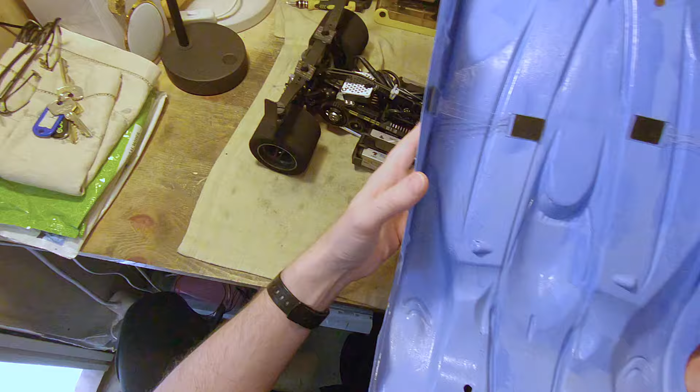So the body is quite simple, and I just added some stickers - 990 Viper, Hobbywing because it's Hobbywing electronics, Power HD because the servo is Power HD. Yeah, that's it for the body.

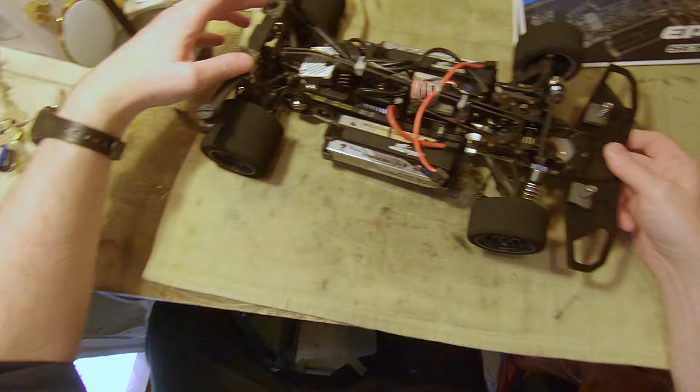Also I added some foam here under the body mounts, or on the body mounts, so the body will sit good and not vibrate. Also, if the body is very loose, you will hear a lot of noise from the body when you are driving, and I don't like that at all. So the body should now sit quite tight to the car.

I added the fan to the motor here, and I used the fan mount that I showed you in my previous video. But one thing is that the holes in the fan mount here are for 2 or 2.5 millimeter screws, but the holes in the motor mount are 3 millimeter. So you have to drill up these holes here to get 3 millimeter screws down.

Also, this is new for me, because the 989 did not have this - this chassis stiffener, or whatever they call it, I'm not sure. That's here on the car. It would hit on the fan here, so you should maybe try to get a fan which is not this tall.

Also, I added this grid on top of the fan because where I'm driving there are maybe some small rocks sometimes, so just to lessen the chance for something to get into the fan, I added this grid here. So I had to use my Dremel, my filing machine, and remove a bit of this carbon fiber just where it would hit the fan.

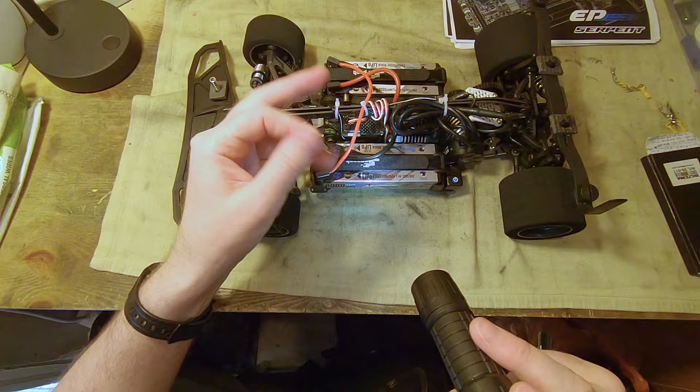Is there something more? Well, I have the connection servo, of course. I don't have a transponder now - is that the right word? No, I mean the device you use to track the laps, time the laps. I only have now the receiver, the fan, motor fan, and of course the servo. So that's the 3 plugs you see here now.

Yes, and batteries 2S. They are connected in series, so you have 4S power, and that is quite simple. You see, from the ESC you have the plus here to the plus of this battery, and the minus to the minus of this battery, and then you just use this cable to connect the plus of this battery to the minus of the other battery, and that will give you 4S power when they are connected in series.

And if I turn on the car now, you can hear the fan from the ESC and the motor fan there, and the ESC is counting up to 4S. So that's really just the car.

The setup I will also show you in the description, but it's like the default setup, except I only use 1 degree camber in the rear and 1 degree camber in the front, 1 degree outward toe in the front, and I think 2 degree inward toe in the rear. So I use less camber in the rear, and that's because I don't drive on real tracks where I can drive really fast and have high corner speed, so I don't need more camber in the rear.

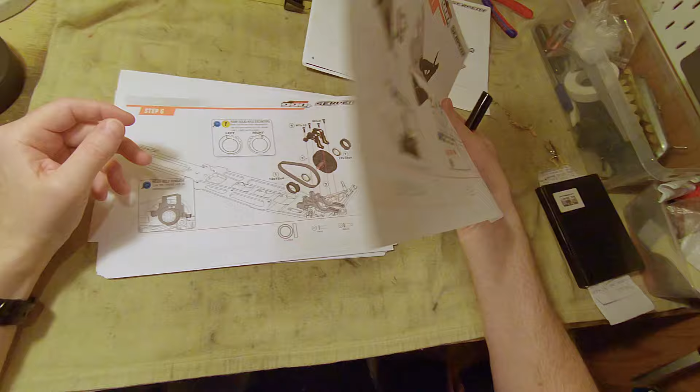Was that something else there? No, that was all right. Here is all right, I will just comment on things that I have something to say about. If I don't say anything, it's all right.

This is the rear sway bar, and you have 4 screws for the mount in the front, and 2 set screws in the rear. But when setting up the car, you want to disconnect the sway bar completely when setting the droop. To do that, if you just remove the 2 set screws, it's not easy to get this wire or metal piece out of the mounts. So you also have to unscrew the 4 screws, then you can lift it up and get it out. If anyone knows an easier way, comment.

Then we have the rear upper arms, with these small plastic bolts you use here. Sometimes this can be a bit hard to get in, because it's easy to get the wrong thread and destroy the threads either on the plastic bits or in this part. Maybe this part could be aluminium, though I'm not sure if that's a good idea. At least it would be nice if Serpent included a few spare parts, maybe 4 instead of 2, in case you do something wrong and destroy the pieces.

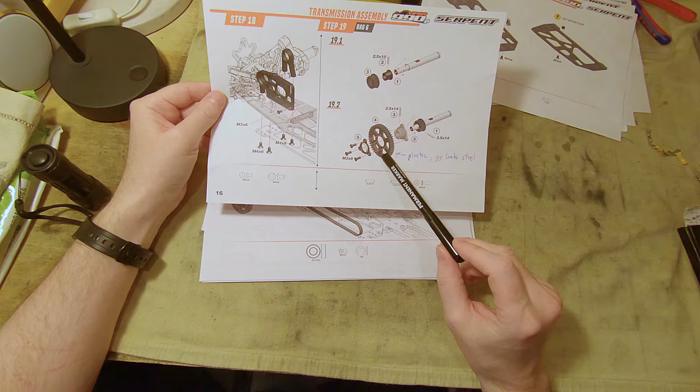Then we have the stock spur, which is plastic or composite. As I said, I bought the steel spur, not the exact same tooth count. Move on, nothing to say here, everything is good.

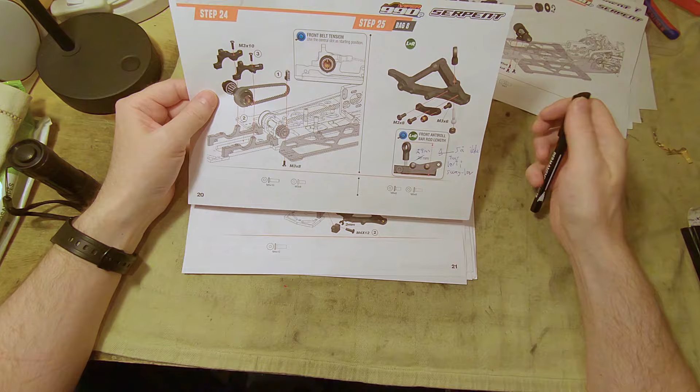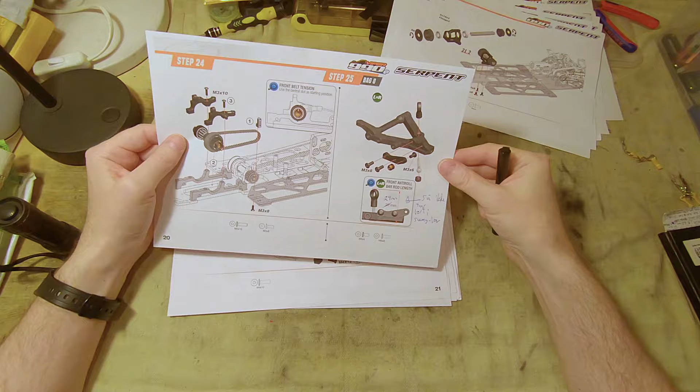Then we have the front anti-roll bar rod length. Some people online say that if you keep this at stock 28mm, the front sway bar will touch the front axle. So you can lift it up a bit. I got it to 29mm or even a bit over, so you don't have any touching parts.

Not much to say about the servo saver, but I used a bit of thread lock on the thread so it doesn't unscrew itself. I'm not sure if that's even a problem, but before tightening I put on some thread lock. I think I did a bit more than 1mm just to be sure — you don't want a weak servo saver.

These are the links from the servo saver out to both sides of the steering. This rod could be a bit shorter, because if you go with the 41.5mm from the manual, it goes quite far inside the rod ends, and you can even see it swelling out if you put it too far in, and it could break out. So this rod could be maybe 4mm shorter — it doesn't need to be as long as it is. At least that was the case for me; maybe for others it's fine as is.

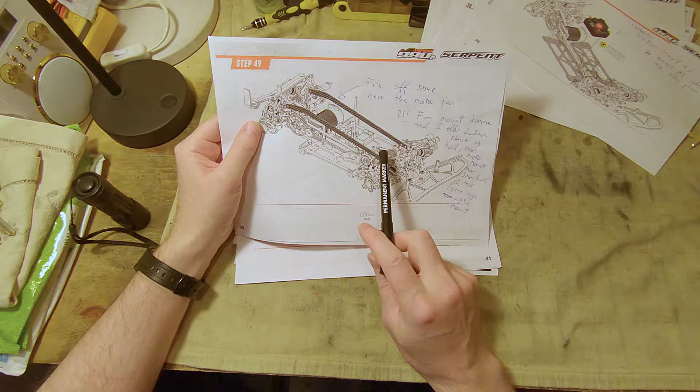This carbon fiber chassis stiffener, or body stiffener as they call it, I had to file off a bit where the motor fan was. Also, as I said, you have to drill up the fan mount holes to 3mm if you're using 3mm screws. The motor mount has 3mm holes, but the fan mount just 2 or 2.5.

So that's, I guess, everything. Nothing big to complain about. The user manual was okay to follow, and all the parts were included as they should be. Nothing broke when I finished off the car.

Let's see. Yeah, I can see it's quite a tight fit here with the ESC. The sensor cable is quite tight here, so I don't think you could use a much bigger pinion. As I said, it's a 32 tooth metal spur gear and a 22 tooth pinion. You could maybe use a 23 or 24, but not much more room. Then you'd have to move the electronics some at least. You can always make it possible, but with this setup it's alright.

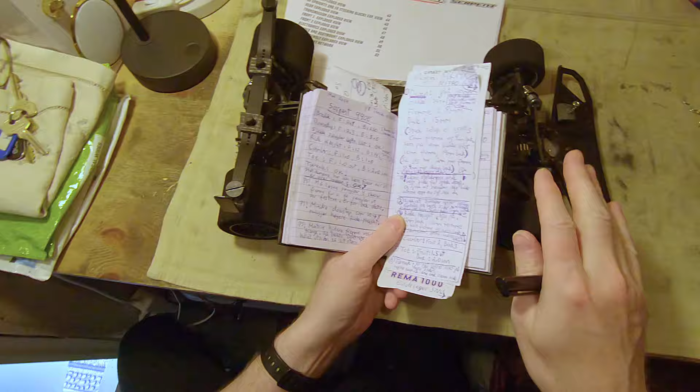I'm now saying the different setups in the order that I check them. The ride height in the front I have 12mm, and in the rear I have 14mm. That's with new wheels, and the wheel diameter is 71 in the front and 77 in the rear. Camber in front is 1.0, camber in the rear is 1.0, toe in the front is 1.0 out, toe in the rear is 2.0 in. And the tweak of the car is also okay.

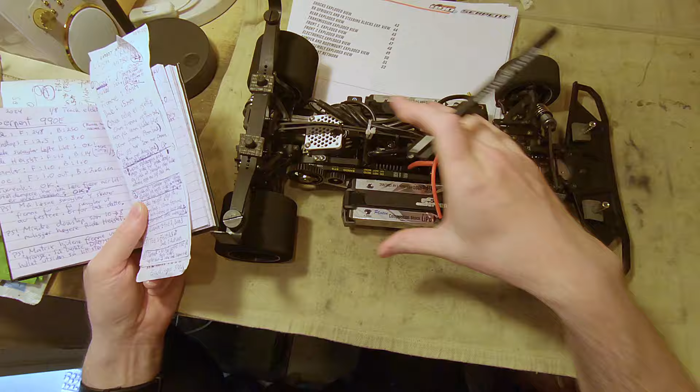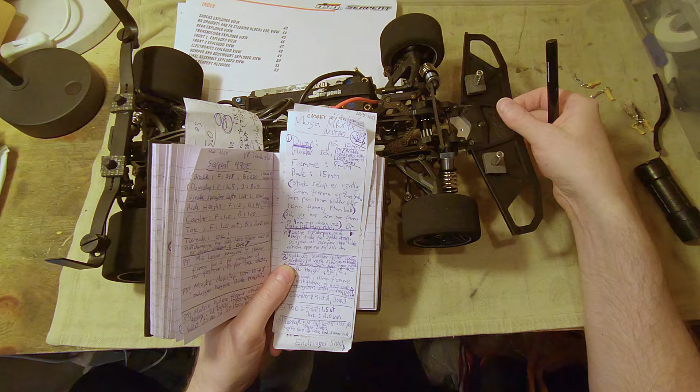With the tweak, you have to check that the weight is balanced and that the wheels are lifting at the same time, both in the rear and the front. If not, you have to adjust the shocks a bit. Also check that when you're lifting the car up, the springs of the shocks are not moving freely. They should be a bit tight, so they're under pressure. You should never have the springs moving freely - then you're too loose on the shocks, or you should get some new springs really.

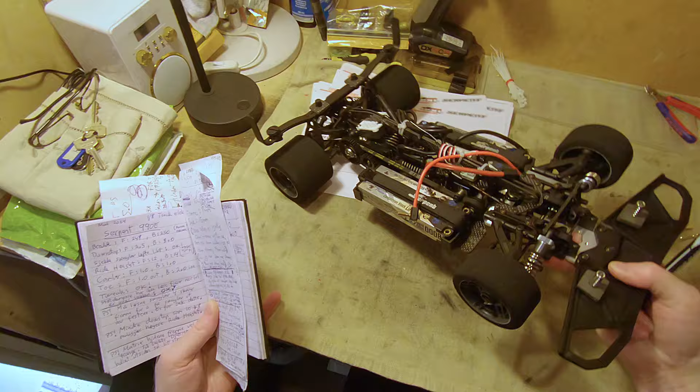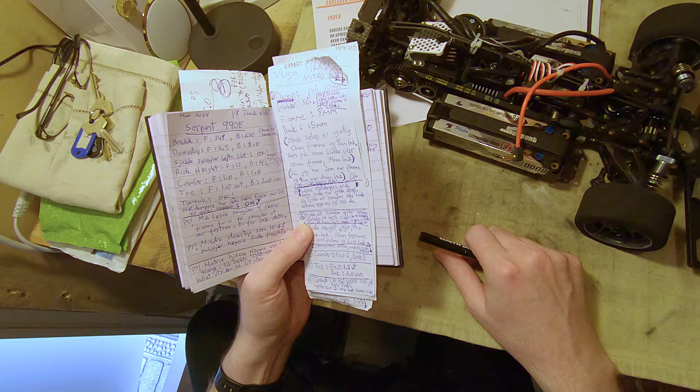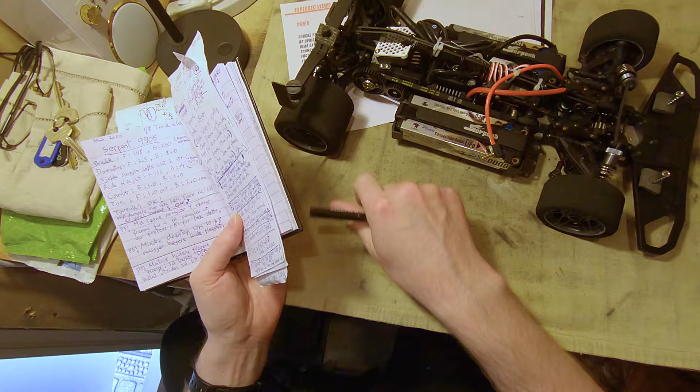Why do I have droop 8 in the rear? That's because I wanted the ride height to be a bit higher in the rear, like 14mm. If you go down on the droop from 10 to 8 on the rear, you can have a bit higher ride height in the rear.

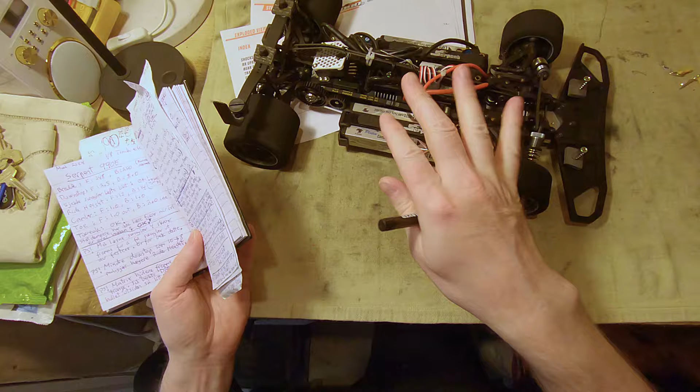Why do I like that? Because, as I said, I'm not driving on a perfect, very smooth track with no rocks or sand or anything. I'm usually driving on parking lots, and there could be some uneven spaces and some small rocks. So I really like to have a bit more ride height.

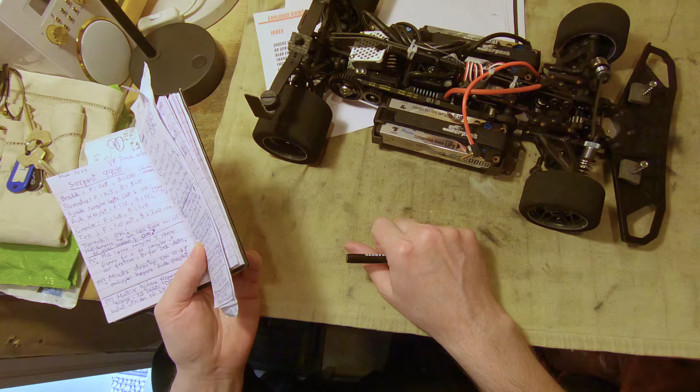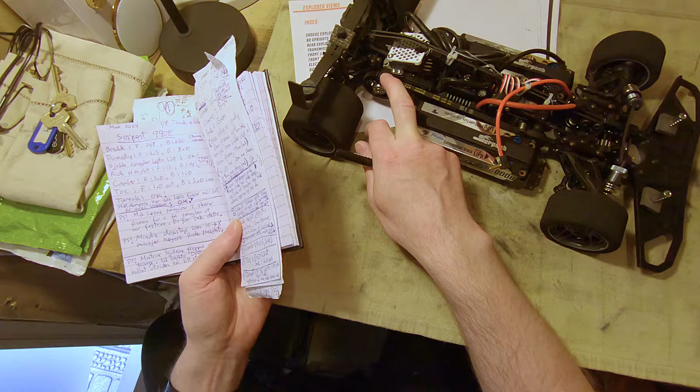Also remember, this is with new wheels. After some driving, the wheels would maybe wear 5mm on the diameter, and of course the car will then get a bit closer to the ground. So instead of, let's say, 14mm, you could maybe in the end be closer to 10 or 12mm ride height in the rear. Also in the front, of course, you have the same.

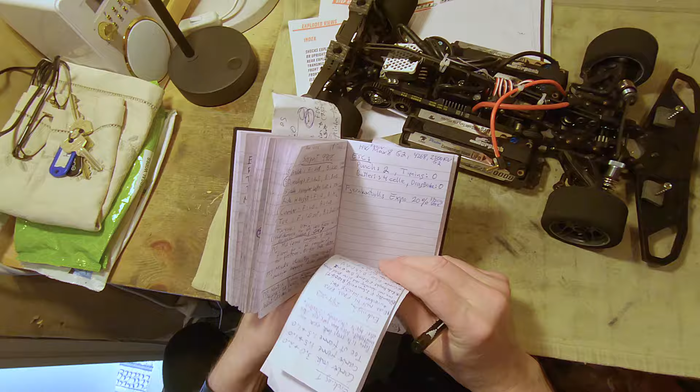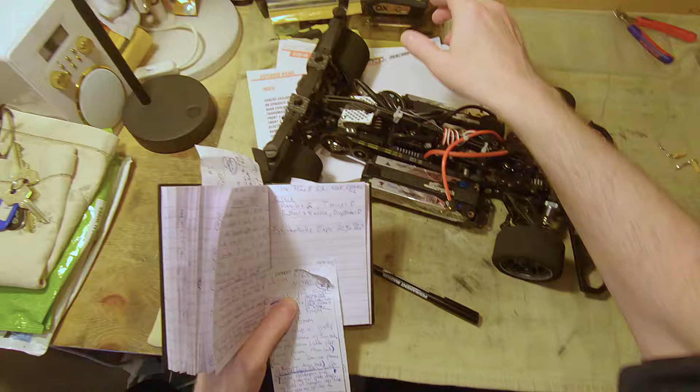For the ESC, I'm using punch 2, timing 0, drag brake 0. And on the transmitter, this is Spektrum, I'm using Expo at 20%. So that's more or less the setup, I guess.

So I have not tested the car yet. I don't believe I have time this day to do it. So I have to wait till we get some better weather again with some dry asphalt.

But I think it will behave very good. Also the asphalt area I'm using quite near where I'm living is not that big, so I will not be able to drive this car very fast. But I will get the feel how it handles and how it handles in the turns, how the traction is. But I will not get the feel of the high speed and how the body is working with the downforce.

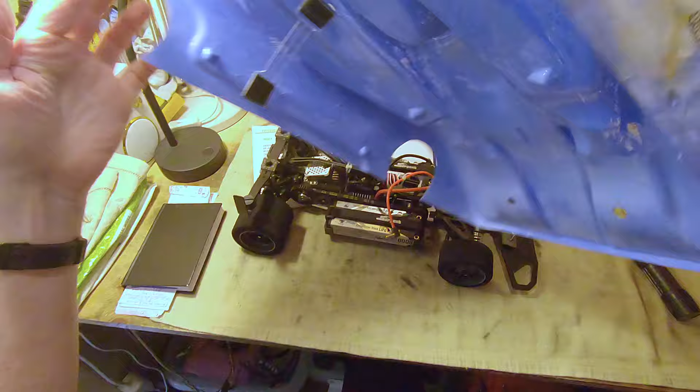Because a lot of the point with this type of cars and bodies is that you will get a lot of downforce from the wind, from the air, when you're driving at high speed, and that will keep the rear pushed very hard to the ground, and that will give you good traction on the rear. So when I'm driving not that fast, I'm missing that traction. But as I'm not driving that fast also, I will have enough traction anyway, I guess.

With the 989E, I experienced that these cars have a very good turn radius, can turn very sharp. Just be careful with using the brakes, because if you use the brakes too much, you will see the rear part slide out. So let's say you come here and you take this left turn now, like this. If you hit the brakes too late in the middle of the turn, the car will just turn over like this. So brake here, then take the turn, just slide to the turn. Don't brake in the middle of the turn if you are driving too fast and if you are touching the brakes too hard. Yeah, I guess that's everything really.

So enough blah blah blah. I will also add some images when I built the car. Not a lot of pictures, but some pictures so you can see some details of how the parts are assembled really.